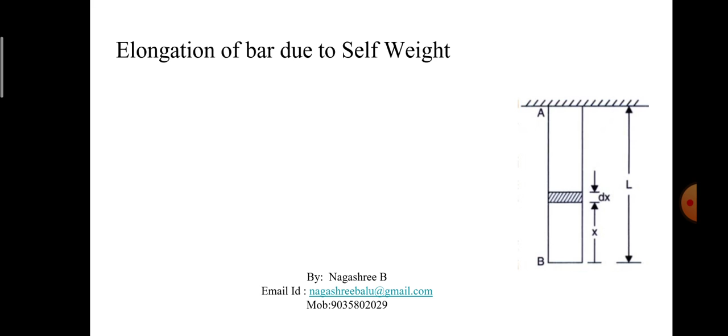Let us assume that the bar is fixed at one end and free at the other end under its self weight. Let us assume that the length of the bar is L, cross section of the bar is A, E is the Young's modulus of the bar material, and the specific weight of the bar, that is weight per unit volume of the bar, is equal to W. So I just repeat it.

I have considered a bar AB shown in the figure, assuming that at A it is fixed and at B it is free, so it is freely hanging under its self weight. I have assumed that L is the length of the bar, A is the area of cross section, and the Young's modulus of the material of the bar is equal to E. W is the specific weight of the bar, or weight per unit volume of the bar.

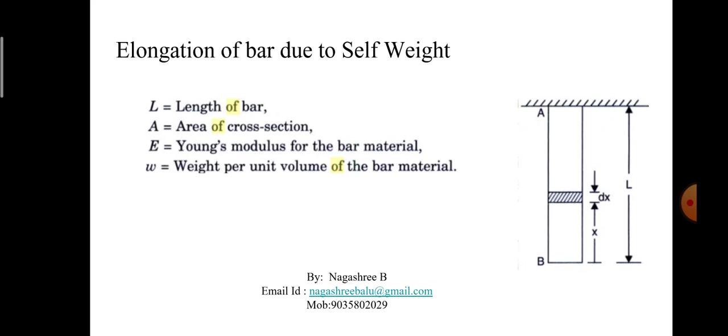Now I have considered a small strip of thickness equal to dx, the shaded portion you can observe here. Its thickness is dx, and it is at a distance x from the lower end, that is from face B, as shown in the figure. I just repeat: I have taken a section, the shaded part, having thickness dx at a distance x from the lower end, that is face B.

Now I will consider the weight of the bar of length x in order to understand the load acting over the small strip of thickness dx towards the downward direction. The weight of the bar for the length x is given by P. P is equal to specific weight into volume of the bar up to the length x.

I just repeat: I will consider the weight of the bar for the length x in order to understand the load acting over the small strip of thickness dx towards the downward direction. So I need to consider only the weight of the bar for length x, given by P equal to specific weight of the bar into the volume of the bar up to the length x. The specific weight, as I said, is taken as W.

The volume up to length x is equal to area into length. Area is A, length is x, so P is W into A into x. This is the weight of the bar for length x.

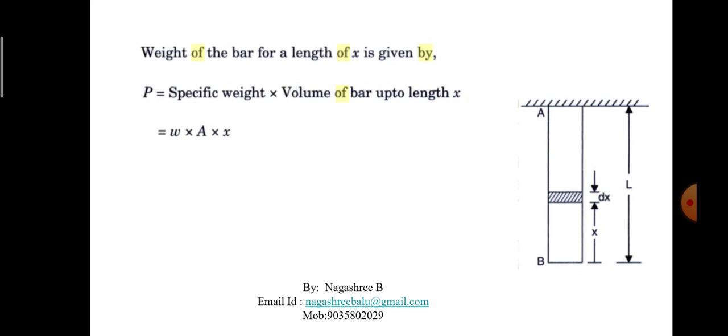So as the weight of the bar for length x is acting on the smaller strip of thickness equal to dx towards the downward direction, there will be some stress and some change in the length of the bar due to the self weight. So therefore, stress on the element is taken as weight acting on the element to the cross sectional area, so weight of the element per cross sectional area.

So therefore weight acting on the element is nothing but the weight of the bar until the length x, which we have determined here. So w into A into x, divided by area of cross section A, so A and A get cancelled, so therefore the overall stress will be equal to w into x. So this is the stress which is induced for the length x of the bar.

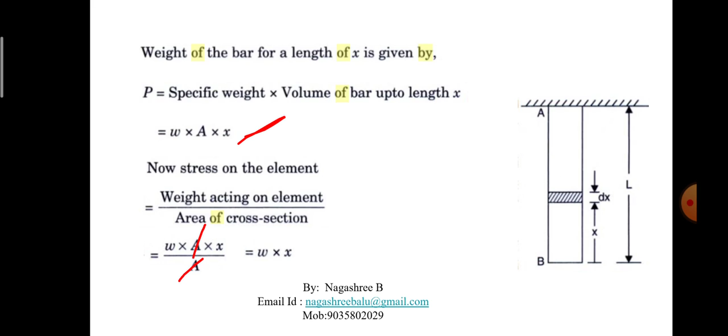And from here we can easily conclude that stress induced in the length of the bar due to self weight of the bar will be directly proportional to x. So therefore stress is directly proportional to the length x here. So next, we are going to determine the strain and elongation of the smaller elementary strip here, that is the shaded portion.

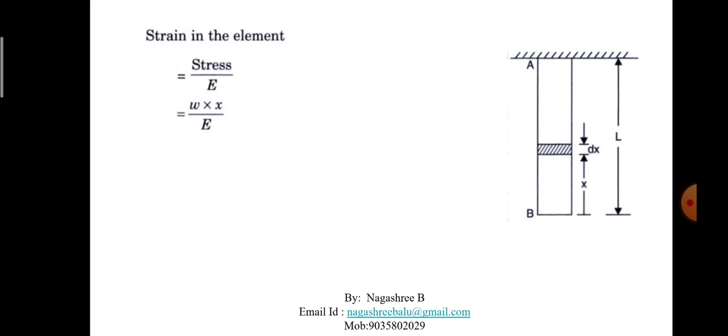So strain in the element: as we know, strain is equal to stress by Young's modulus. Stress in the previous slide we have determined as w into x, and E is the Young's modulus. So therefore strain is equal to wx divided by E.

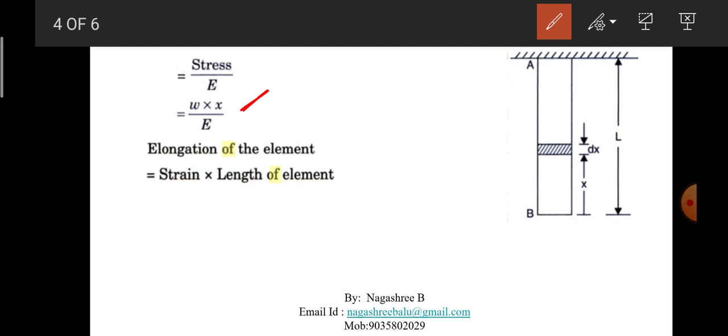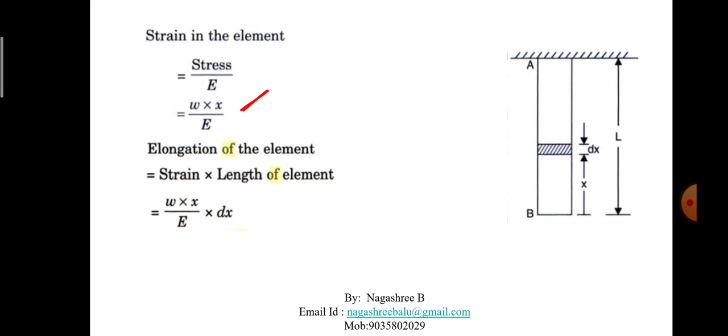So next is the elongation in the smaller strip or elementary strip. Elongation is nothing but strain into length of the smaller strip. Strain we have got as wx divided by E. Length of the elementary strip is dx, only for that element we are going to consider, so that is the thickness dx. So w times x into dx divided by E will give you the elongation of the element. So this is the elongation for the elementary strip.

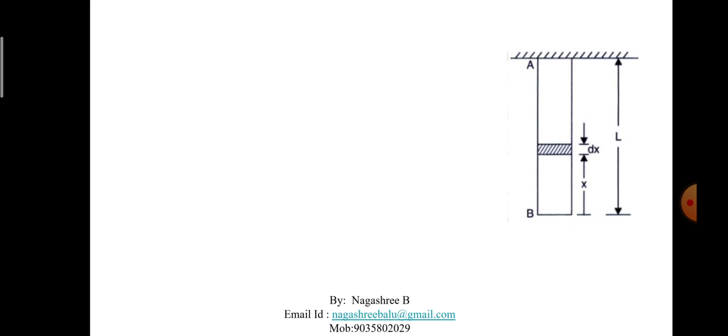So in order to find out the total elongation of the bar due to the self weight, it is obtained by integrating the equation of the elongation of the elementary section with limits 0 to L. So therefore delta L will be equal to the integration from 0 to L of wx dx divided by E. Here w by E is a constant, so we take it outside the integration. Integration from 0 to L of x dx is x square by 2. So wL square divided by 2E is the value.

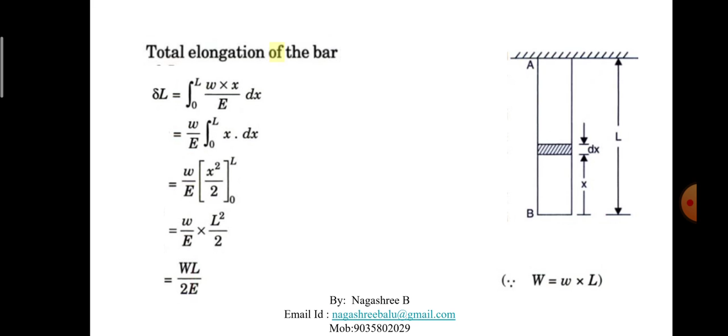So therefore it can also be written as w into L divided by 2E, wherein small w into L is equal to capital W. Small w is the uniformly distributed load, whose unit is kilonewton per meter, kilonewton per mm, or Newton per meter. Multiplied with the length, we get the value of weight load in terms of kilonewton, which is considered as a point load. So w into L is taken as capital W, that is nothing but the point load.

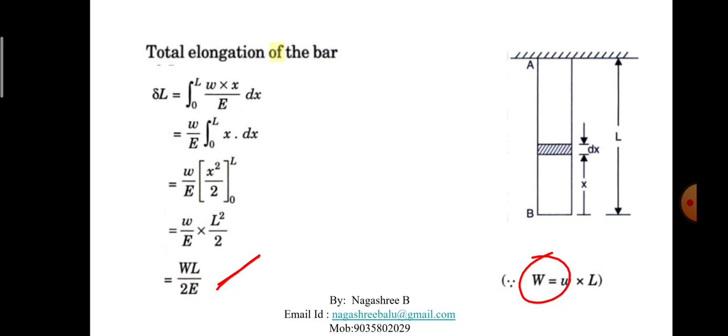So therefore it can also be represented as WL by 2E. So therefore the total elongation of the bar due to the self weight will be equal to WL by 2E.